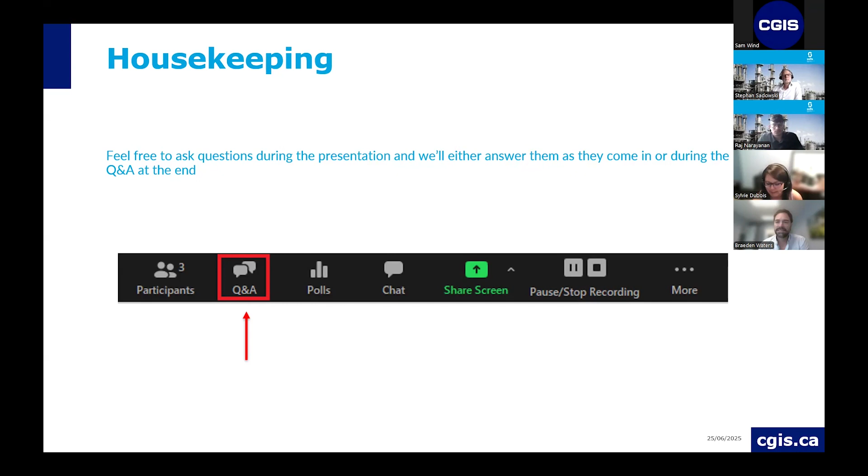Thanks, Sylvie, for the introduction and for giving us a chance to present some incidents. Well, the incidents haven't been nice, but they give us a chance to introduce them and showcase what can be done to prevent such incidents in the future.

First of all, the purpose of Sofis is to protect the people, the property, and the planet with our expertise and solutions to guarantee safe and efficient valve and manual valve operations. First of all, no injuries, no accidents, no spills, no loss, no downtime.

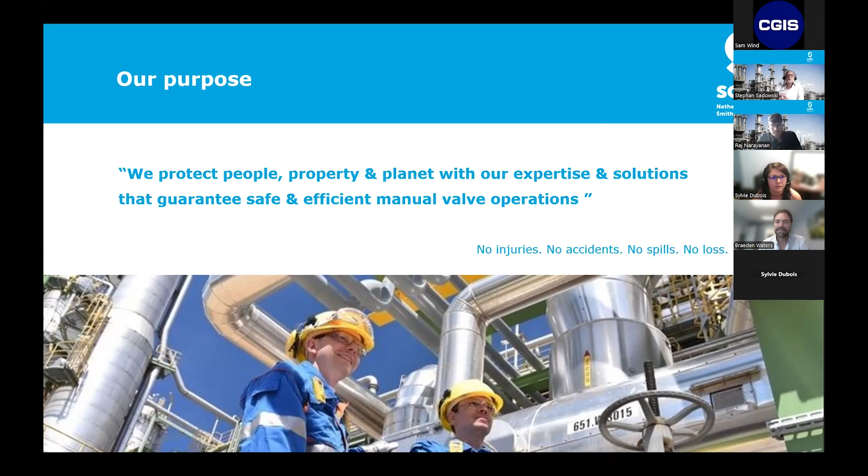In today's webinar, after a first introduction, I want to give you a short overview about the captive key system. Then I will introduce the US Chemical Safety and Hazard Investigation Board. After that I will jump over to the first incident at a refinery in Louisiana, followed by the second incident at the MGPI processing plant in Kansas. And then afterwards, we will have the Q&A.

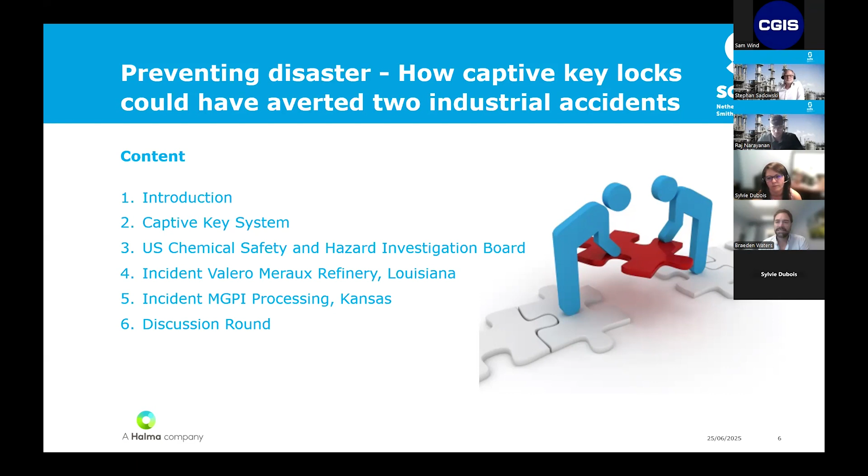My name is Stephan Sadowski. I'm the head of business development at Sofis. My background is mechanical engineering, and I'm now over 27 years within this business.

Sofis is a manufacturer and provider of individual captive key and valve operation solutions for the process industry. Our strengths are the adaptation of customized solutions for seamless implementation into the existing infrastructure of our customers. Sofis is a merger of two companies, Netherlocks and Smith Flow Control, and that merger happened in 2016. Sofis is part of the Halma company. Halma is a global group of life-saving technology companies split into several sectors, and Sofis is part of the safety sector.

Halma was founded in 1894. First time I thought, oh, might be a typo, but no, that's true. Halma began as Halma Tea Estate Company Limited, focused on rubber production and tea planting in Ceylon. Nowadays, we have over 45 companies under the Halma umbrella, with around 7,000 employees, and Sofis is part of Halma.

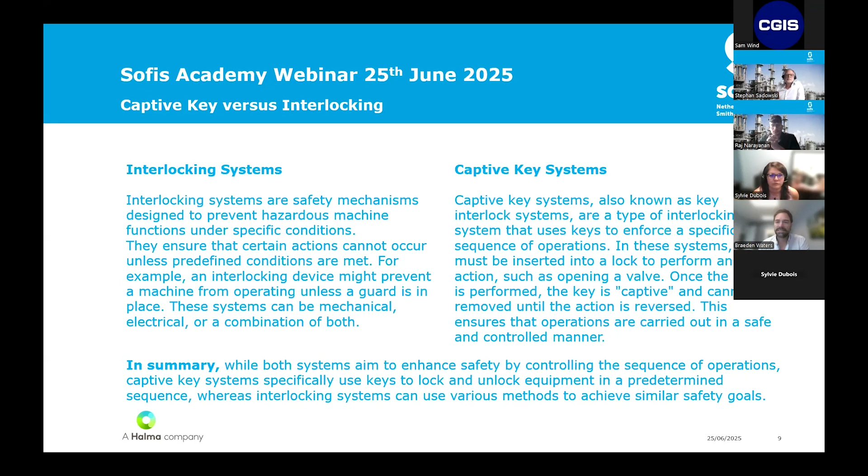If we talk about process safety and sequence control, I want to showcase some small examples of the different safety principles versus their investment costs.

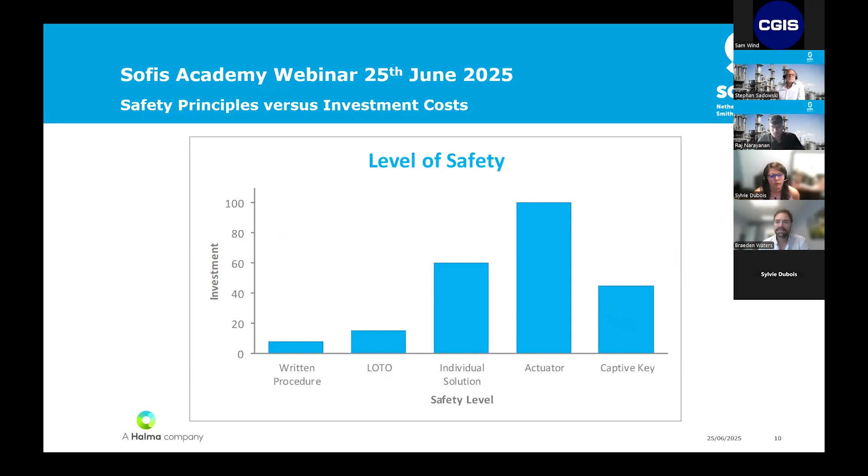And this is also what you can see in the two incidents today. What we also can see is that written procedures tend to be ambiguous, complex, and require time-by-time judgment or decisions from the operators. And this is definitely something we want to prevent.

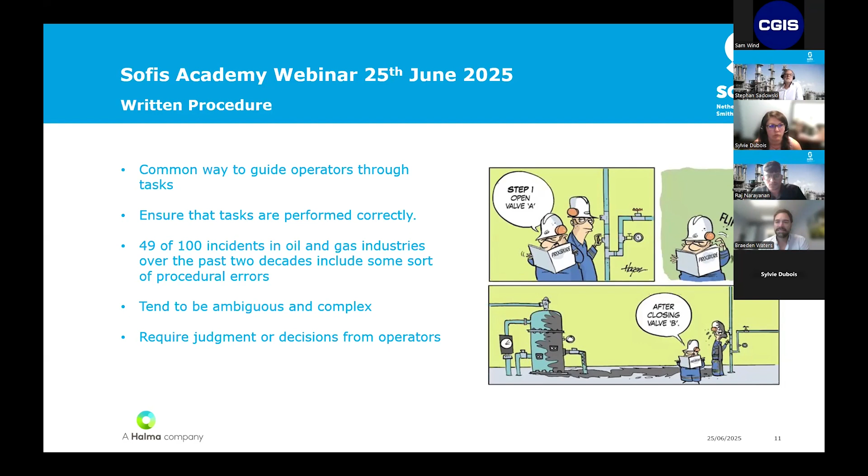If we now jump over to lockout-tagout, in a more general definition, lockout-tagout is a procedure used to isolate hazardous energy sources to prevent accidents during servicing or maintenance. For the process industry, it is common to use this method to prevent, for example, valve operation. Valves that should be blocked in an open or closed position because of the process get equipped with car seals, hand wheel covers, or similar blocking solutions.

Therefore, a clear differentiation between the two different ways of use is necessary. The main challenges are lack of procedures, what we touched already before. Also, the training of the employees is an important aspect and should not be underestimated. From our own experience, we know that there is a lot of room for improvement by using lockout-tagout.

Online training becomes more and more a useful tool. The use of the right tags and padlock is also a very important aspect within lockout-tagout. Therefore, it should be clear to have procedures in place to separate the different ways of use. As already mentioned, it is very common to use this method to prevent valve operation.

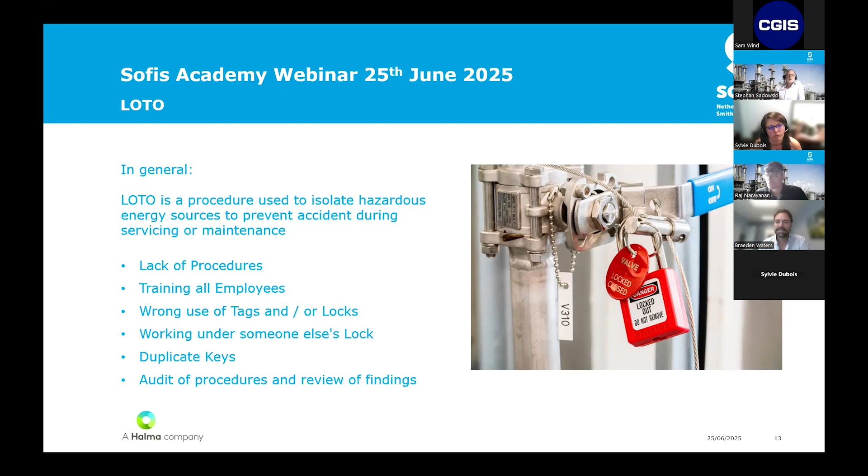So this is a method you can use for boundary valves or not really safety-relevant valves where you want to have a dedicated sequence of operation.

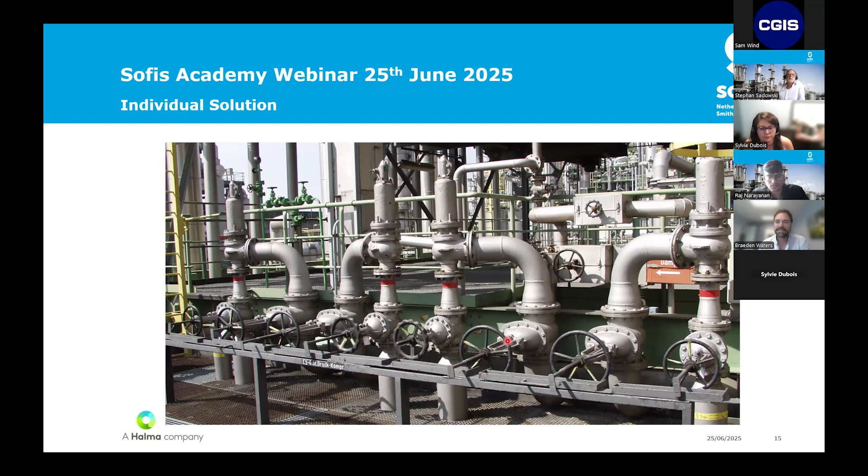The disadvantages of such solutions is that you have to bring all the valves to the same level because there are welded flex in front of the stems. So this requires already design impact. There is a lot of steel work required in front of the valves, so this will also hamper the operator from operating the valves in a proper way. The large sliding bar is difficult to handle, and yeah, it's a space-consuming design.

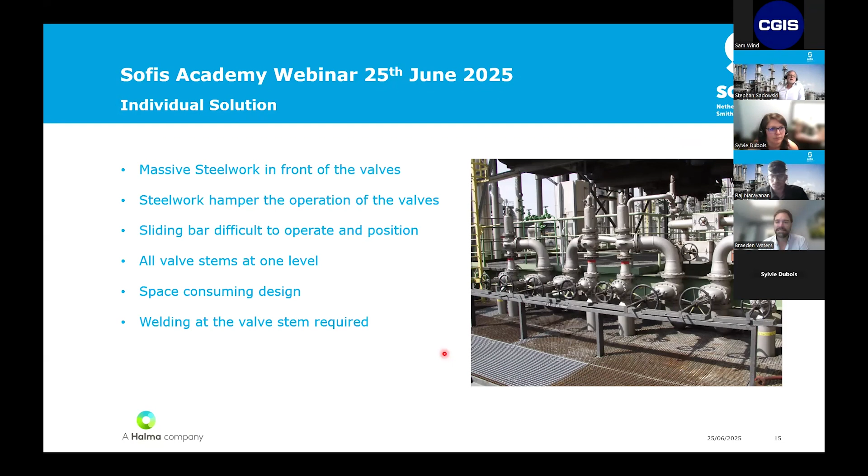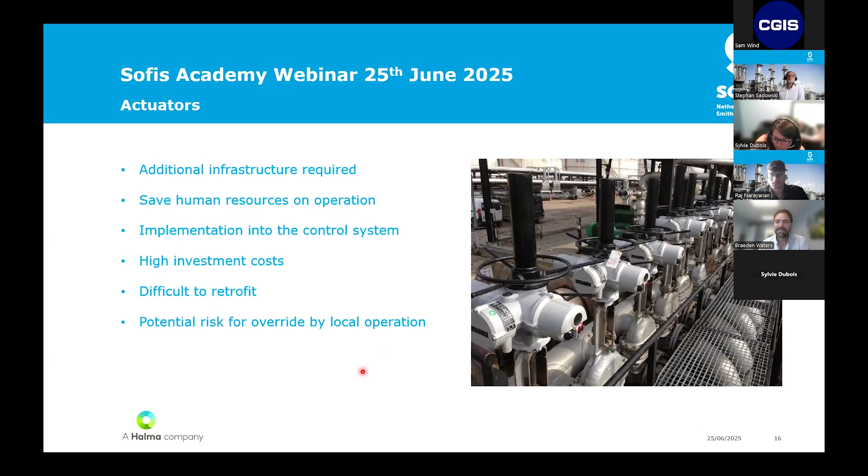If we look at full automated systems, this is definitely a solution, but also there you need to take care about the existing infrastructure. To retrofit actuators in a brownfield plant is always a challenge. You need to have the cabling in place, all the signals and everything else. So this might be an option for greenfield projects, but not really for brownfield projects.

If we look now to the captive key systems, this is a fully mechanical solution, and it will guide the operator to the unique sequence, which will be adapted to the process requirements. And to guarantee the right sequence of operation, we are using unique coded keys. There is no misinterpretation on the steps possible because you have the coded keys. We are also able to handle even complex processes in a safe way, even if they are not linear.

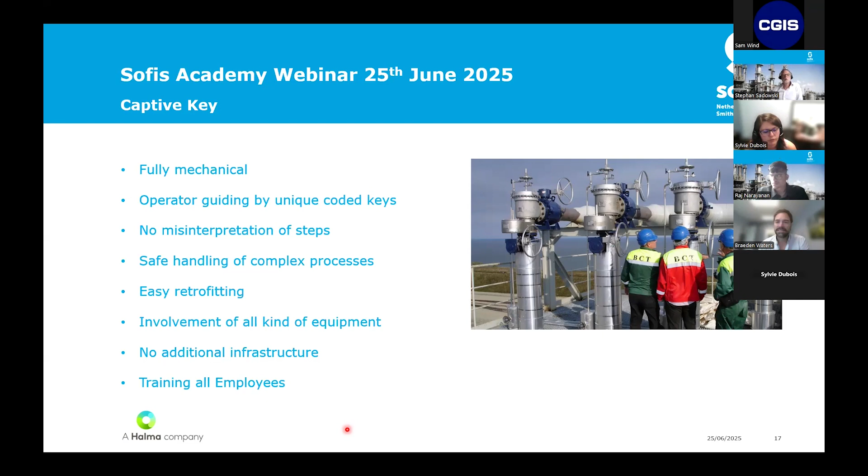It's easy to retrofit on every type of valve, even in brownfield projects. And it can also involve all kinds of equipment, doesn't matter if you have valves, actuators, or pig trap doors, or what else. No additional infrastructure is required, and yes, you need some kind of training for the employees so that they understand how to operate the valves in the right sequence.

The LOPA handbook described also the use of captive key systems. In the LOPA handbook, it's described as an independent layer of safety and will give you some credits in your HAZOP. The description of the captive key system is that it is a mechanical linkage between the valve, using unique coded keys to prevent movement of a device such as door, handle, or valve.

This prevents humans from operating the valves in the wrong sequence. The captive key lock capability is an integral part of the hardware design, so the captive key lock needs to be one part with the valve, so there is no chance to separate both during normal operation.

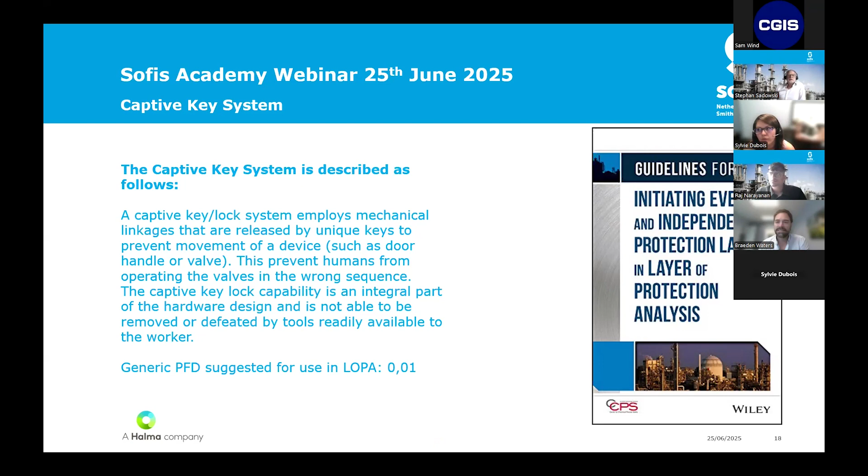Now let's have a look at the incidents. What I do is continuously review the reports from CSB, the US Chemical Safety and Hazard Investigation Board. They do a really great job investigating chemical incidents, and the CSB is an independent federal agency. If you haven't heard about them or seen their website, it really makes sense to visit them and have a look.

Let's start now with the first incident. On the 10th of April 2020 at the Valero refinery in Louisiana, there was a release of a mixture of hydrogen and hydrocarbon gases in the hydrocracker unit, and these gases formed a flammable vapor cloud. This cloud got ignited, resulting in an explosion and fire that seriously injured one of the Valero operators and caused damage of over 5.15 million dollars in property. What happened?

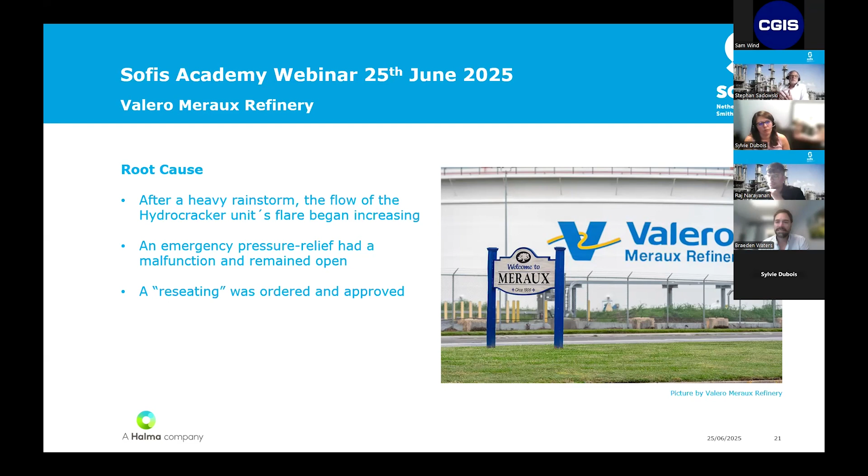The root cause was that after a heavy rainstorm, the flow to the hydrocracker unit flare began to increase. After some investigation, they figured out that the emergency pressure relief valve had a malfunction and remained stuck open. Common practice at Valero refinery was the reseating of the safety valve, and this process needs approval from the plant manager, and this approval was ordered and got approved.

The two operators went on site to the safety valve, and they had concerns reaching the 6-inch inlet valve, because the procedure told them they had to close the inlet valve partially until the safety valve reseated, then open the inlet valve again and hope the safety valve would stay in a tight position. The operators could not really access the 6-inch inlet valve. Therefore, they decided to close the 20-inch outlet valve instead. What was the result?

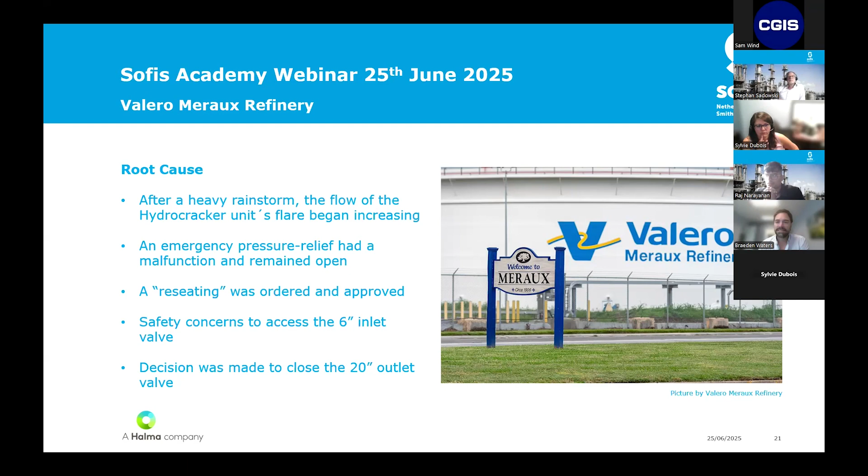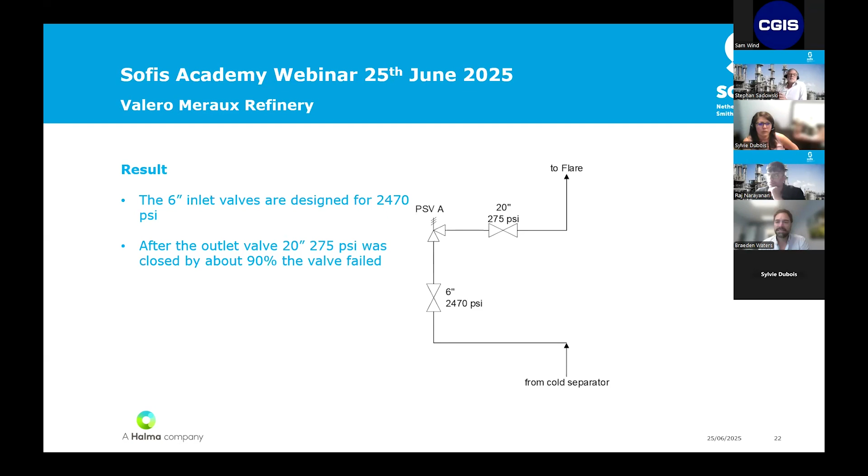If we look at the design specifications, the 6-inch inlet valve was designed for 2,470 psi, and the outlet valve, a 20-inch valve, was only designed for 275 psi. After they closed the outlet valve by around 90%, the valve failed. This ended up releasing a high pressure mixture of hydrogen and hydrocarbon vapor into the surrounding air, and the flammable gases formed a vapor cloud that got ignited, resulting in the explosion and fire.

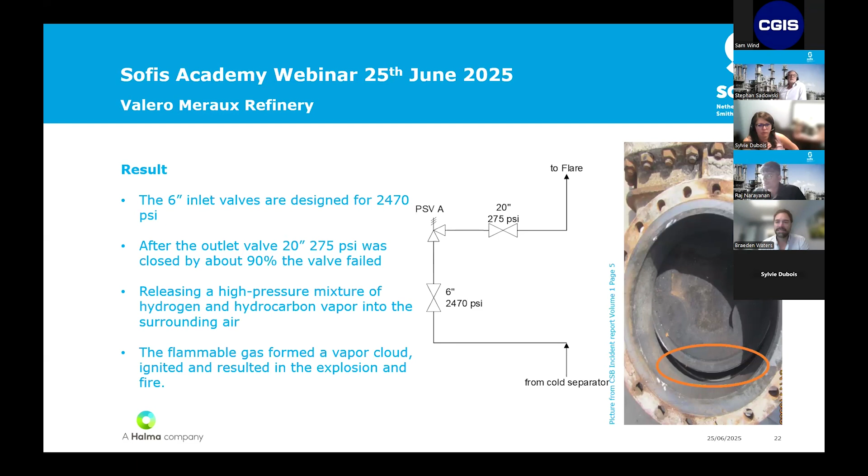How could this have been prevented? By the implementation of a captive key solution, this incident definitely could have been prevented. The captive key solution requires the involvement of both the inlet and the outlet valves, and this guarantees that the outlet valve cannot be overpressurized. It also guarantees continuous pressure protection of your equipment.

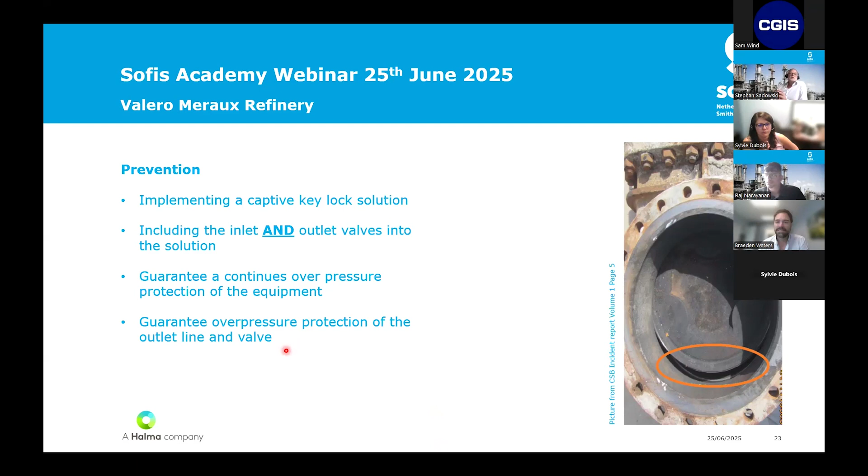If you do a changeover between a redundant PSV system, you have to bring the standby PSV into process before you can start isolating the other PSV system. This will also guarantee the overpressure protection of your equipment upstream of the PSV systems.

If we look at typical specifications in the industry, we can see this setup: a redundant PSV system with inlet valves and outlet valves going to the flare system. Most of the time, we see that our customers only interlock the inlet valves, to guarantee that at all times one PSV is in process. So in this case, you have to open first the inlet valve of PSV B before you can start closing the inlet valve of PSV A.

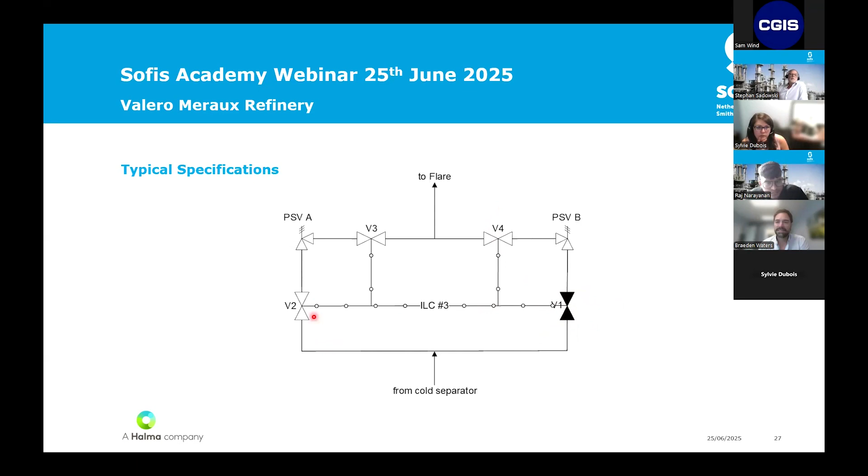On the outlet valves, most of the time they put lockout tagout devices to block the valves in an open position, but this is an unsafe situation. We recommend using this kind of setup where you interlock the inlet and outlet valves. In this case, you have to open the inlet valve first before you can close the inlet valve of safety valve A, and then you can start to close the outlet valve of safety valve A.

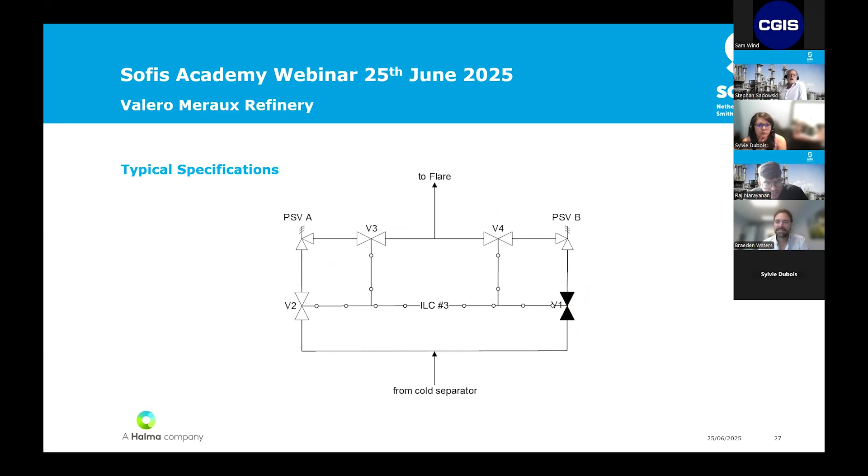This is a typical example of a captive key solution for a redundant PSV system. Here we see the CKC, which is the control key cabinet. The control key cabinet is placed in the control room.

Starting with key 1 coming from the control room, the operator will place the key in the inlet valve of safety valve B. Now he can start operating the valve. He will open the valve, and after the valve is fully open, he can release key 2.

With key 2, he can go now to the inlet valve of PSV A, insert the key, close the valve, and after the valve is fully closed, he can release key 3. With key 3, he goes to the outlet valve, insert the key here, close the valve, and release key number 4. Now the PSV-A is fully isolated and can be taken out for maintenance purposes.

Like reviewing the PSV or whatever. With this kind of solution, we guarantee that all the time one PSV is in process, and we also guarantee that you cannot close the outlet valve before the inlet valve is closed. So this will give protection, overpressure protection also to the outlet valve.

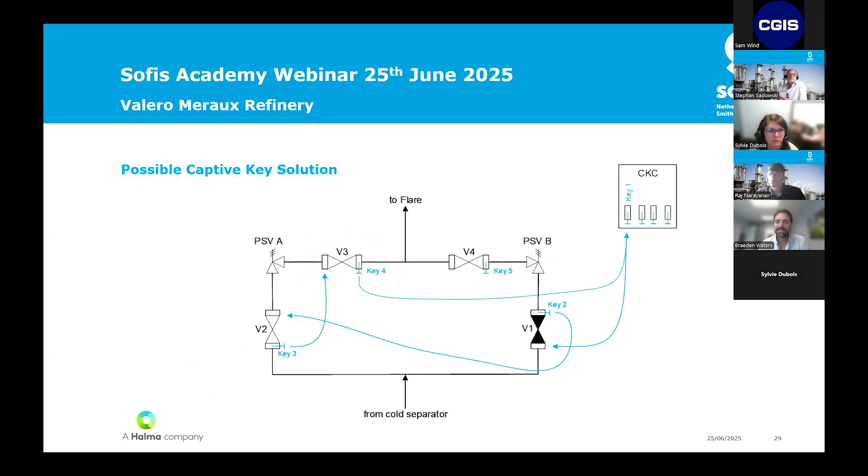What are the key features? Safe operation of a redundant PSV system, which guarantees the protection of the equipment up front. We protect the outlet valve against overpressure.

A clear indication of the isolated PSV by the end key in the control room. So you can use the information coming from the key to make your work permits, because the key will indicate which PSV is isolated and which PSV is in process.

There's also the option for easy implementation of pilot valves. This is also an important aspect. If you have a pilot-operated safety valve, you also need to implement the pilot valve into this sequence of operation. And last but not least, there's also the option for cascading of redundant PSV systems to prevent chattering, for example, of PSVs in case of actions.

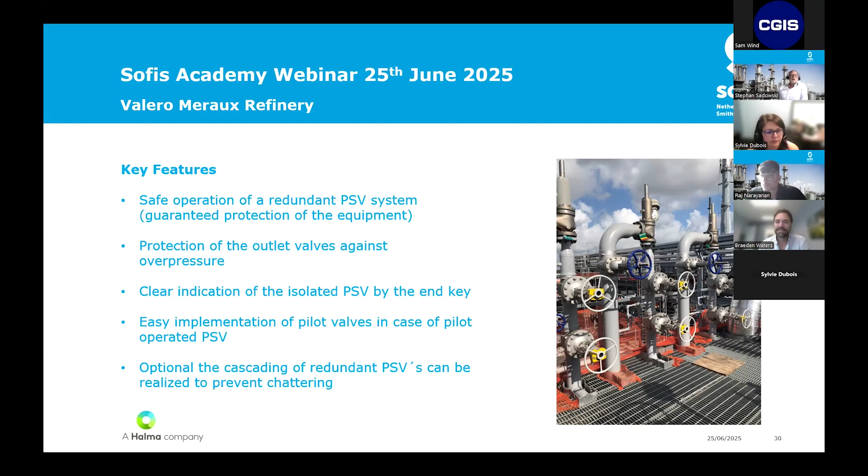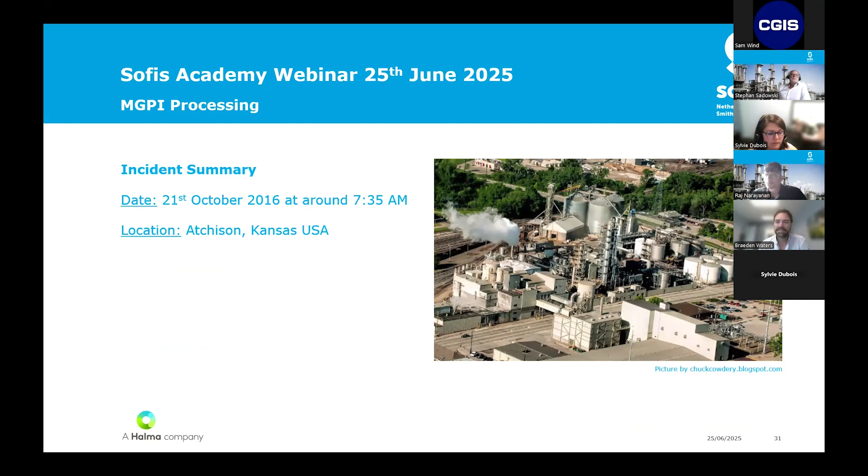Let's jump to the second incident. The second incident happened on the 21st of October 2016, at the MGPI processing plant, which is placed in Kansas.

At the accident, there was an accidental mixing of incompatible components, which have been sulfuric acid and sodium hypochlorite. This produced a cloud containing chlorine and other components. The cloud impacted workers on site and members of the public in the surrounding community, what you can also see here on the picture.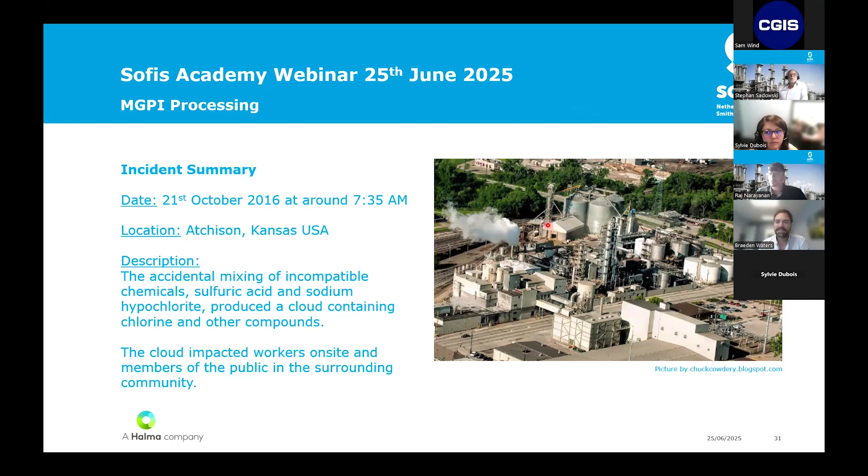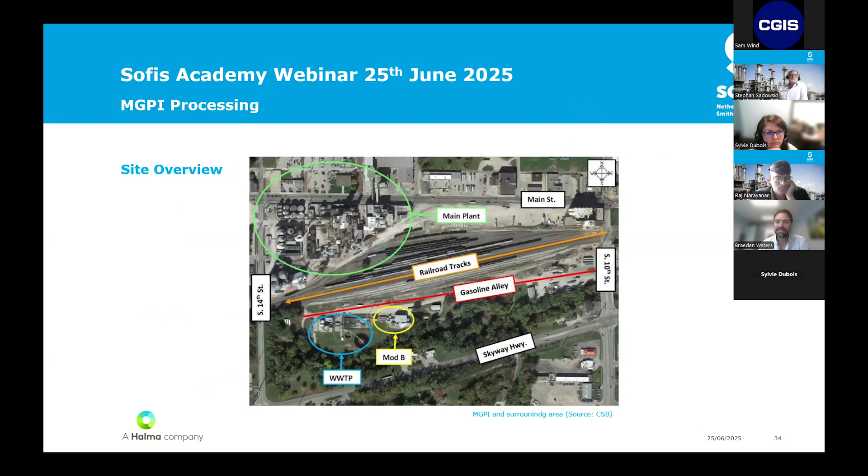On this picture here, you will see this is the location where the unloading and offloading happened. This is the plant, and here you have the surrounding public areas which have been impacted also by this incident.

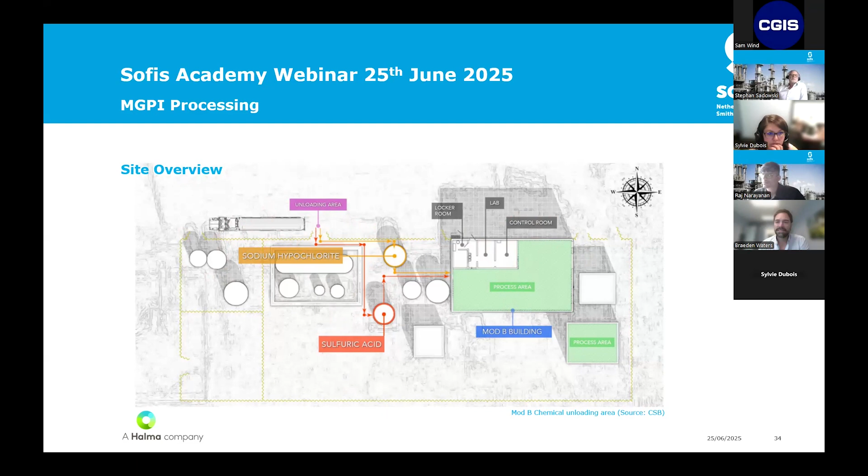Here you have a more detailed overview. There is the Mod B building where the operators are normally placed. This is the unloading area, where the truck drivers connect their hoses and unload the chemicals. This is how it looks like at the unloading point.

And what happened on this day? The truck driver arrived early in the morning, and the operator from the night shift was present, and he accepted the delivery of the 30% sulfuric acid. Then the operator escorted the truck driver to the unloading area.

At the unloading area, the operator unlocked the gate in front of the transfer equipment and removed the lock, the padlock, which had been on the cam lever dust cap for the sulfuric acid fill line. But the truck driver was at his truck and had done some paperwork at this time.

Then at a later stage, the operator reports that he pointed to the line of the sulfuric acid, but the truck driver reported no, the operator didn't point it to the fill line. So what happened afterwards?

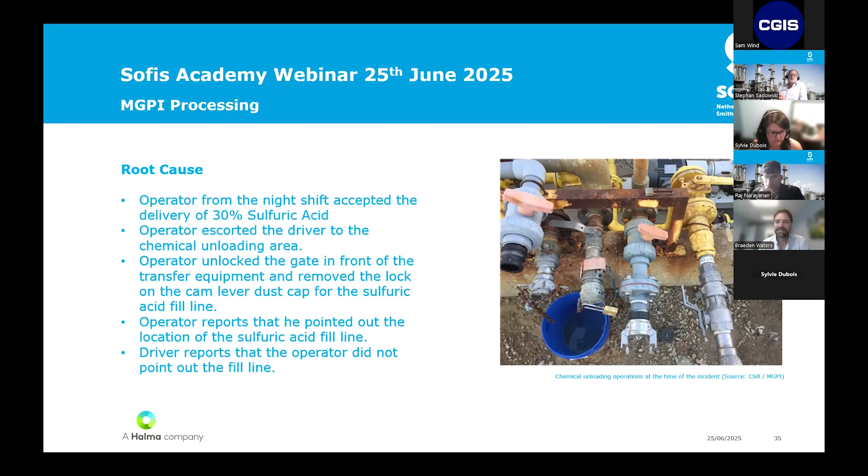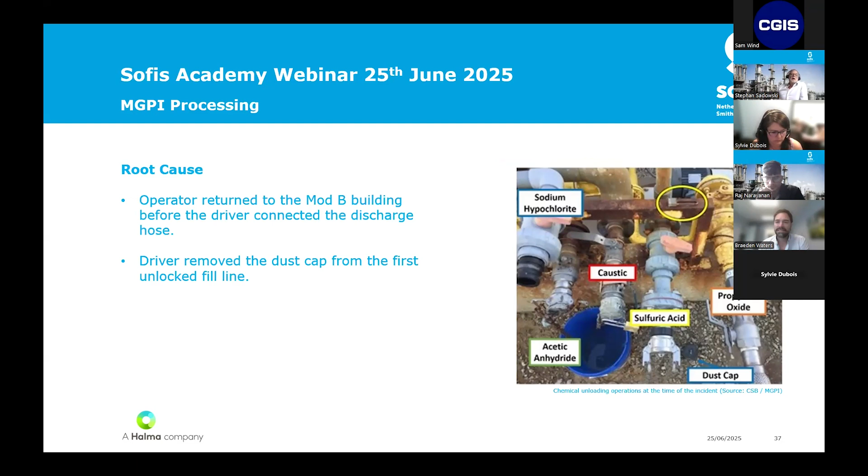The operator returned to the Mod B building, and the truck driver started to connect the hoses to one of the unlocked fill lines. By accident, he connected the hose to the wrong line and started the unloading process.

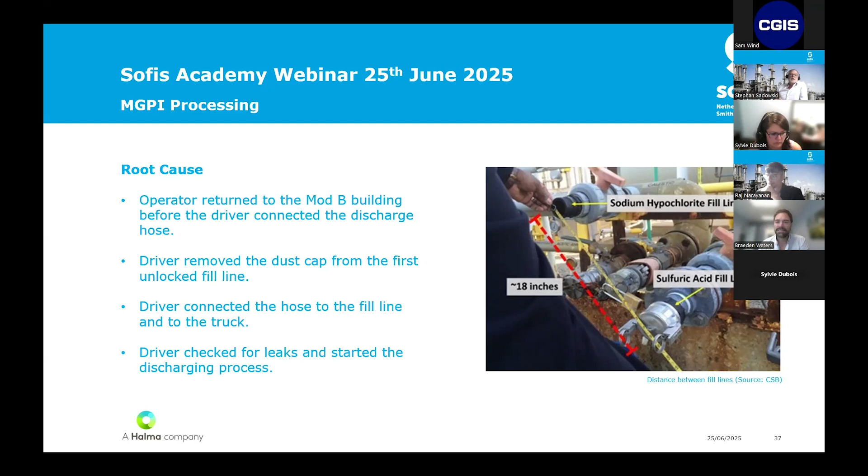After that, the truck driver checked if there had been any leakages at the hoses. The result was that the sodium hypochlorite fill line was unsecured and therefore accessible for the driver.

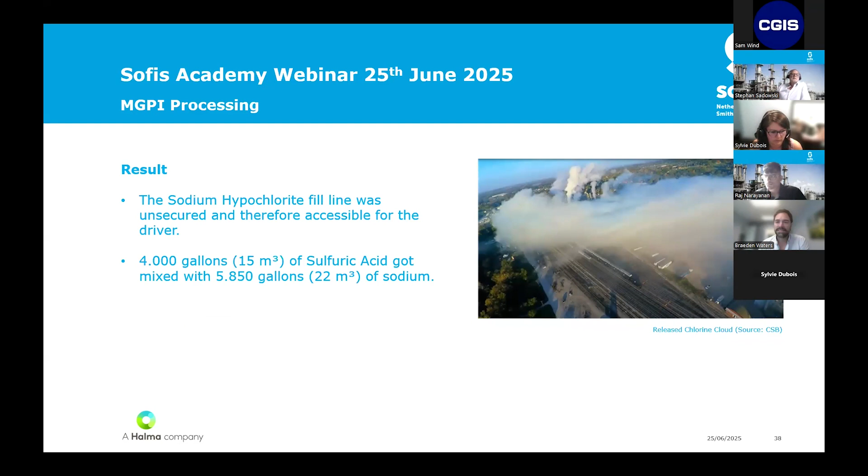He unloaded around 4,000 gallons of sulfuric acid into the sodium tank, which had an input of around 5,850 gallons. These two chemicals reacted and produced a theoretical maximum gas cloud of 3,490 pounds, which was a mixture of chlorine gas and other gases.

These gases have been released through the 3-inch atmospheric vent valve and the 18-inch lid of the roof of the bulk tank. What you can see here from the picture is a gas cloud which moved across the facility and to the public area.

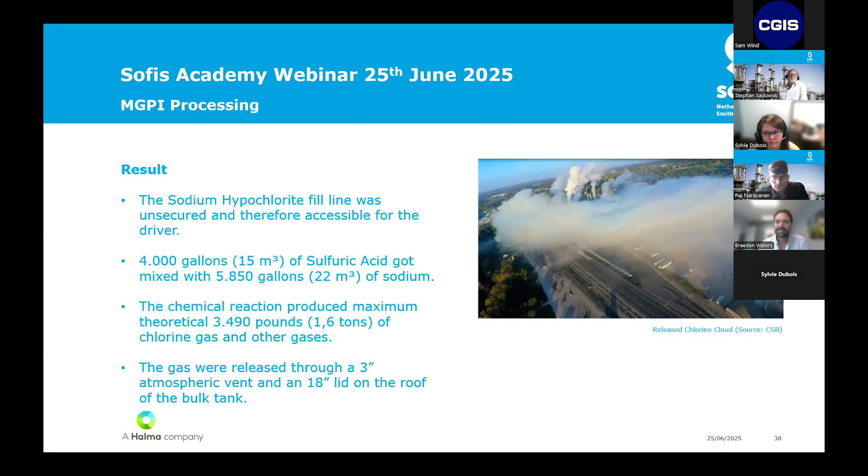How could this incident have been prevented? There are several options. First of all, you can use two different fill line sizes, or you can use different shapes for the fill lines.

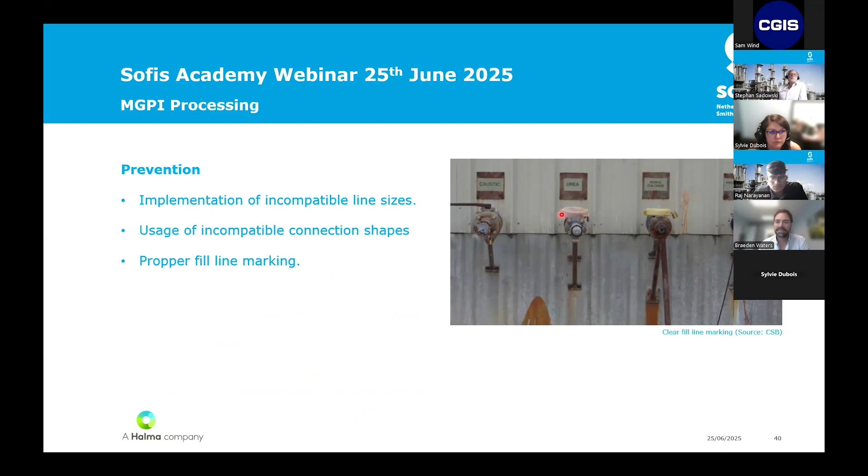What also was missing at the site was a clear indication of the fill lines. Another option would be to put really specific cages in front of each fill line so that you guarantee that only one fill line is available for the customer.

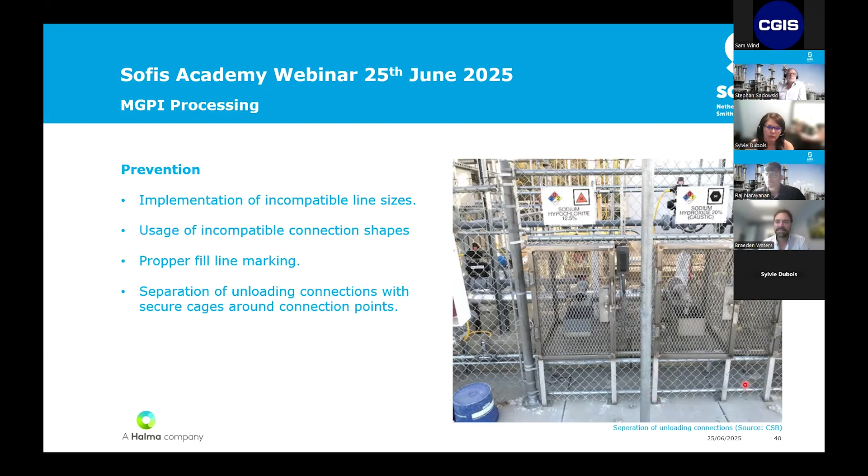Another option would be to implement the Sofis SiLoC solution. How does the Sofis SiLoC solution work?

When the customer recognizes that he needs the refillment of one of his products, he will place a PO at the supplier. With the PO and the delivery note, there will be a QR code printed on the delivery note. The truck driver arrives on site and then he hands over the delivery note to the operators or to the security.

The security starts to scan this QR code at our SiLoC solution, and the SiLoC solution registers which product is loaded on the truck. Then the system decides which key needs to be released, and this key will be highlighted.

The security person will release the key from the cabinet and hand over the key to the truck driver. Now the truck driver will drive to the loading bay.

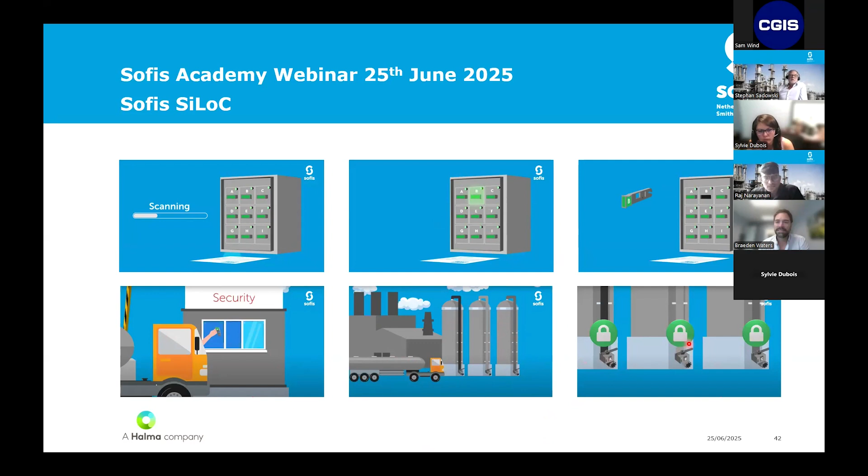At the loading bay, all of the loading lines are equipped with a captive key lock. So the truck driver will connect his hose to the loading point, and after the hose is connected, he will insert the key, and only this key will fit to one loading point.

So you can guarantee that there is no mix-up of the products. Now he is able to open the line and unload the product.

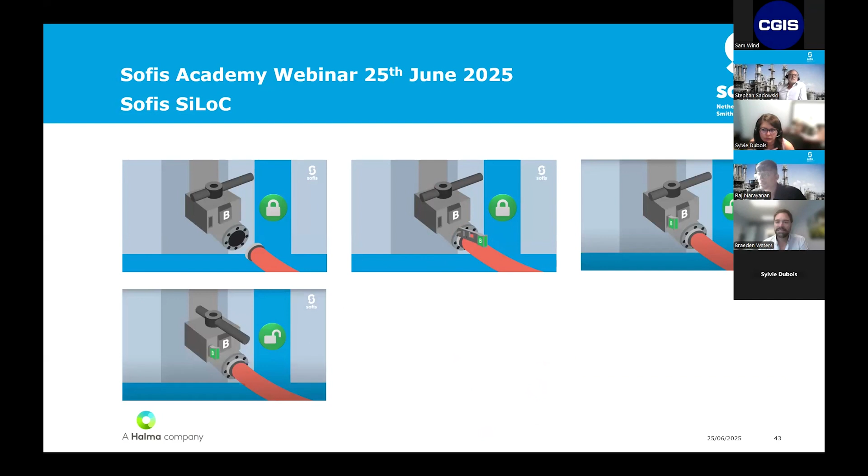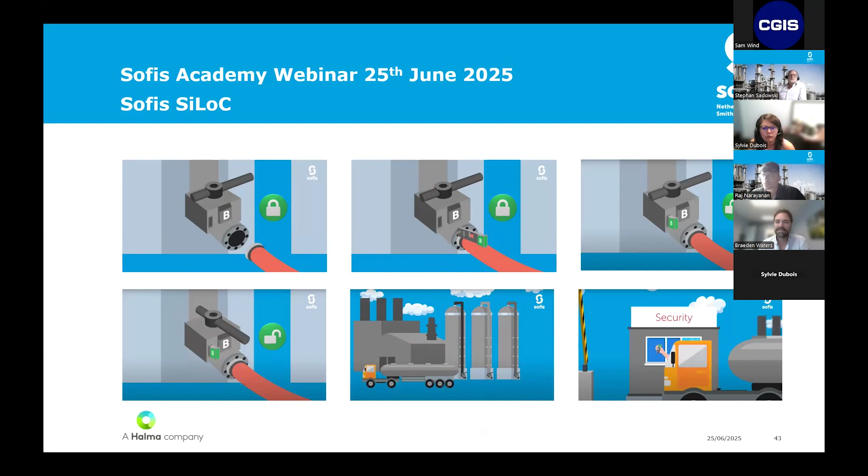After he has finished the unloading process, he will disconnect the hose again. After he closed the valve, he will release the key, and with the key he goes back to the security, hands over the key, and the job is done in a safe way.

What are the benefits? We are fully eliminating human errors during the fill line selection process because of the unique-coded keys. We have unique-coded keys per silo.

There is also the option to group silos. So if you have the same product in several silos, then you can set up the same key code for these silos.

There's also the option to interlock silos against each other. So if you do not want the filling process to be done on several silos at the same time, this can also be realized with this solution.

And there's also the option to provide furthermore information to the SCADA system to showcase which silo will be unloaded or will be filled at the moment.

Last but not least, there is also a connection possible to the DCS system for the interaction with other components, like with a pump startup or whatever.

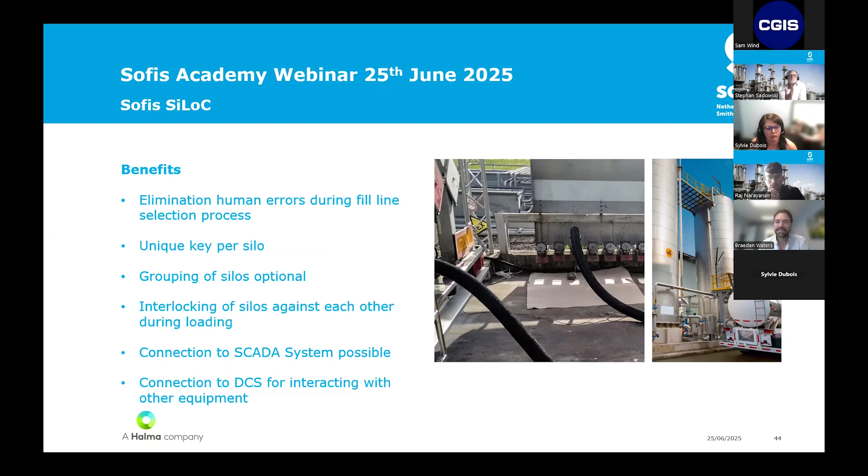So that's it so far from my side. Are there any questions?

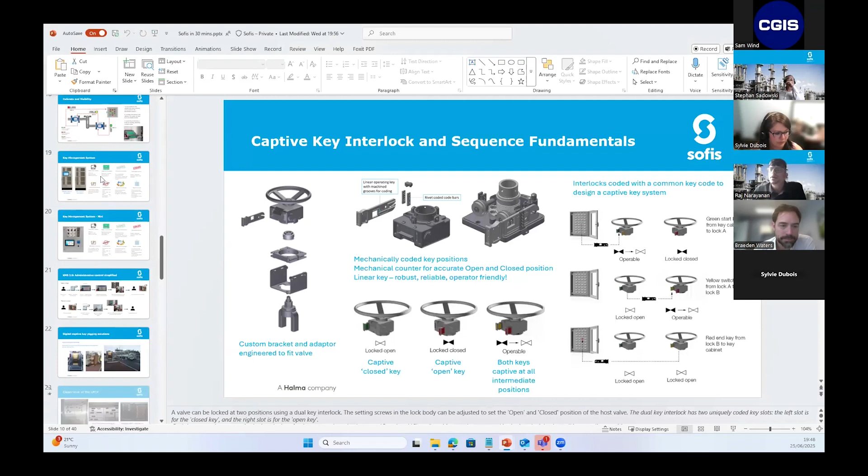Okay, is my screen visible? So with the key management system, before I dive in, I'll show you one more graphic. The key cabinet in the control room that Stephan referred to solves multiple purposes. The first thing is to hold the start keys that start the sequence for each system. So let's say this is a filter system, or you might have a pigging line like this, a pigging sequence like this, or you could have a PSV sequence like this.

Everything starts with one key coming out of the control room, which kickstarts the rest of the process. The cabinet holds the start keys of all the systems, but it also reflects the status of the system on site. This is done by color coding and tagging the keys in the key cabinet correctly. So if, say, this green key is inside, it can tell you exactly what the status of each of those valves in that sequence is, and it can guarantee that for the operators in the control room.

What we're trying to do is bring all of that functionality of storing the right keys in the control room, plus giving visibility, plus also managing the administrative control aspect of tracking keys and managing key handouts. So who gets access to those keys? When did they take access of a certain key? When did that key get returned? What function was achieved using that key? Was a valve status changed? All of these things can be gathered and brought to the same system using a key management product.

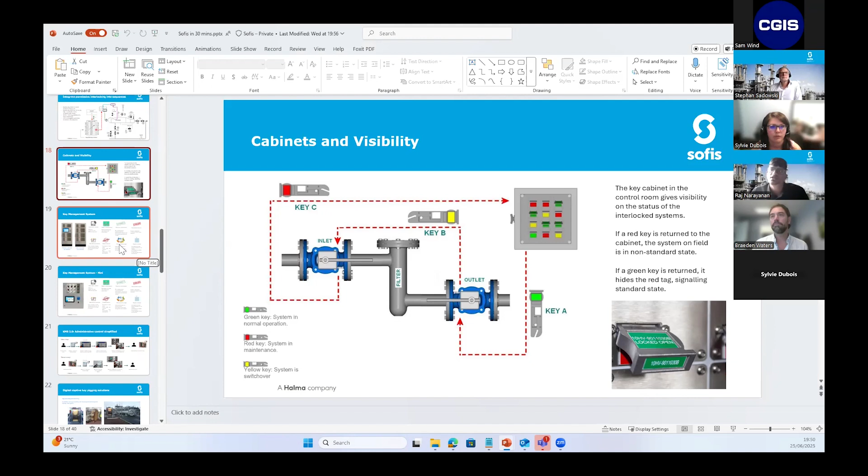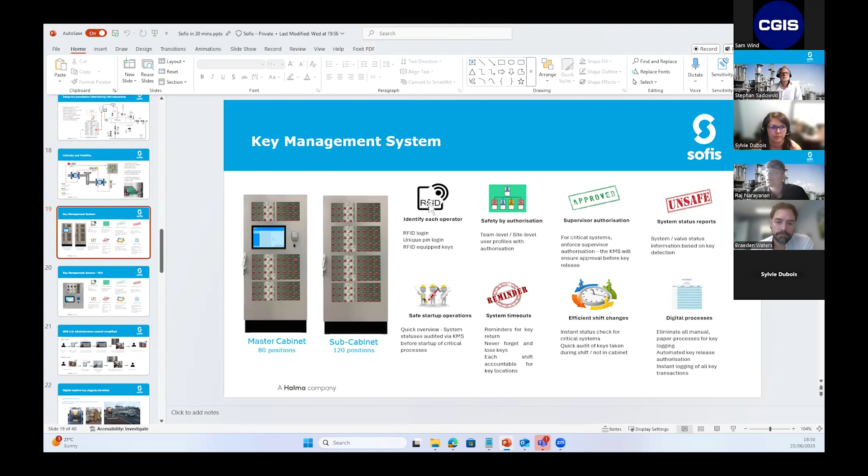So in this situation, the key management system comes with a touchscreen computer and RFID. Typically, an operator would scan their access badge, search for the system they want to access, and toggle the release of that key from the screen. As soon as that happens, the right key position glows up. You press the push button on that key position, a solenoid triggers the release of that key, and then you can walk away with that key. This controls who has access to keys based on who they are, and also gives you all the reporting functionality that comes with key management.

So that's the short gist. I can share brochures or a technical data sheet as required.

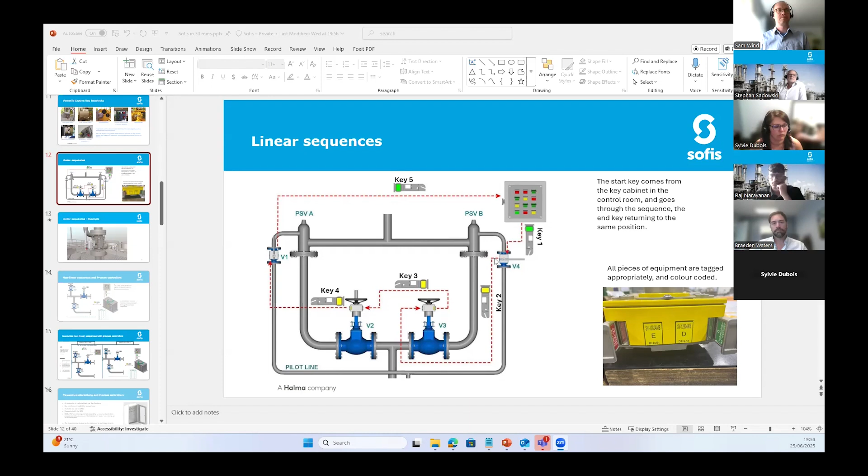You can maybe take an example: the operator is like a motor of an actuator. The programming of the sequence and the locking functionality is done by the captive key lock, and the operator is a motor who is operating the valves, and that's it. He has no impact on the logic.

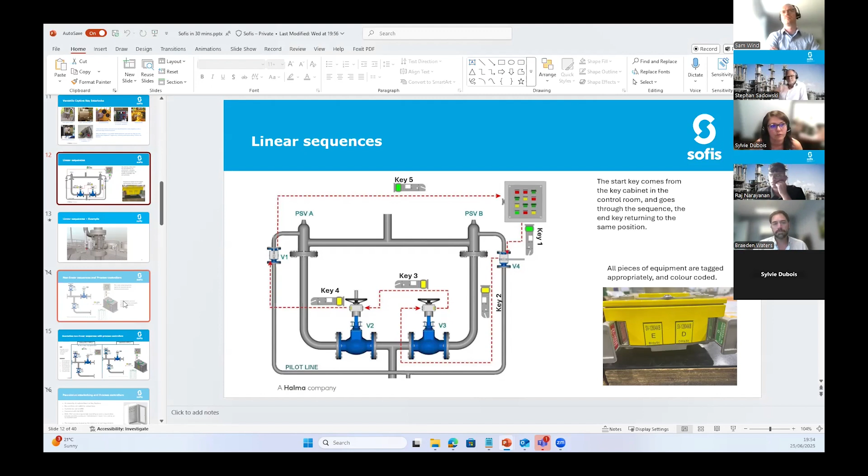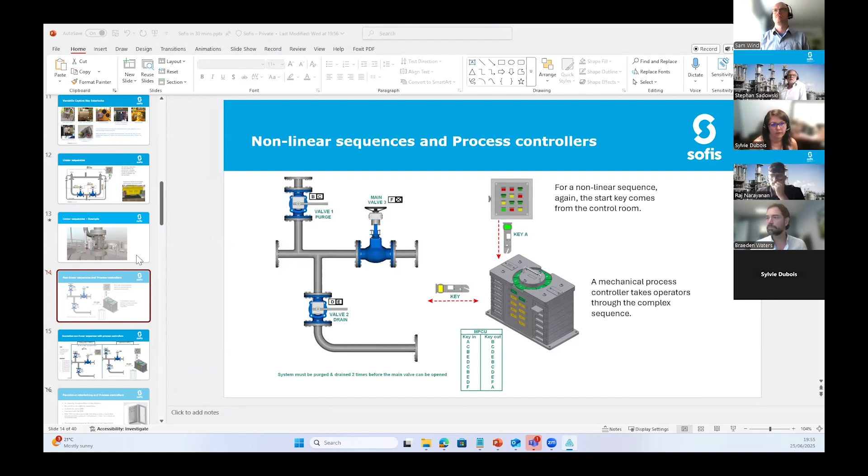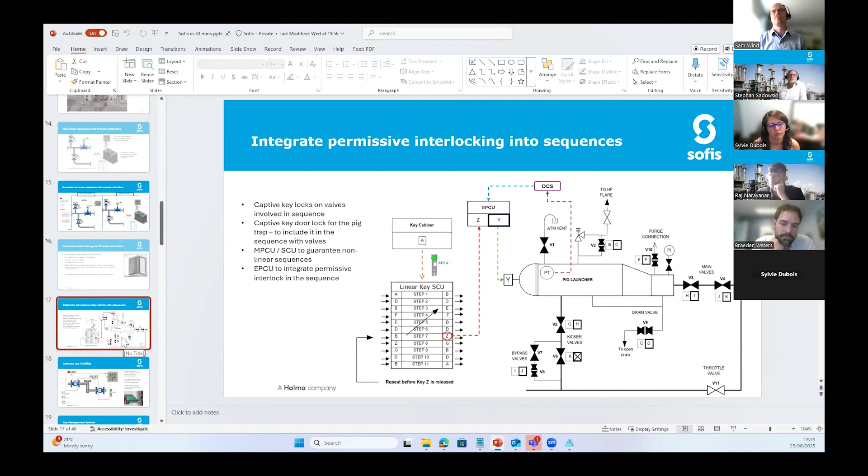If you have non-linear sequences, then this is also possible. There we have the mechanical process control unit, where you have a kind of mechanical setup of all the steps that need to be executed. With such a mechanical process control unit, you can step back and do a lot of steps in between, like for example in pigging applications. This is a very common application for nonlinear sequences, where you have to purge and drain and vent several times, and there you also use this kind of mechanical process control unit. Then at the end, after everything is drained and vented and purged, you are able to open the pig trap door to insert your pig or to release your pig.

Awesome, thank you Stephan. I have one last question. I think we've answered most of them, but maybe for Raj, when do you normally get involved with working with EPCs or end users on designing the interlock system on a project?

But my personal recommendation is that we are involved as part of the detailed engineering phase of the project, where once you've built out a sequence of operation for any process, if you identify that there is a risk that the process can be followed incorrectly, someone could deviate from the safe sequence that has been envisioned for that process, and you're like, this could go wrong because someone makes a mistake with the order of operation or when they operate a certain valve. I think that's the best time to reach out to us and be like, can you design a captive key solution for this?

Then we can sit with the customer and actually try and identify what constraints they want on the process. So sometimes it might just be, I want to do A, B, C, D in this order. But sometimes it could also be things like, I want a pressure transmitter to be sending a signal to a certain key position that now this is safe to release. And these things, the earlier we discuss it, the better, because it also involves conversations not just with the process team, but also might go into piping or instrumentation and control. So as early in the detailed design stage as possible is better.

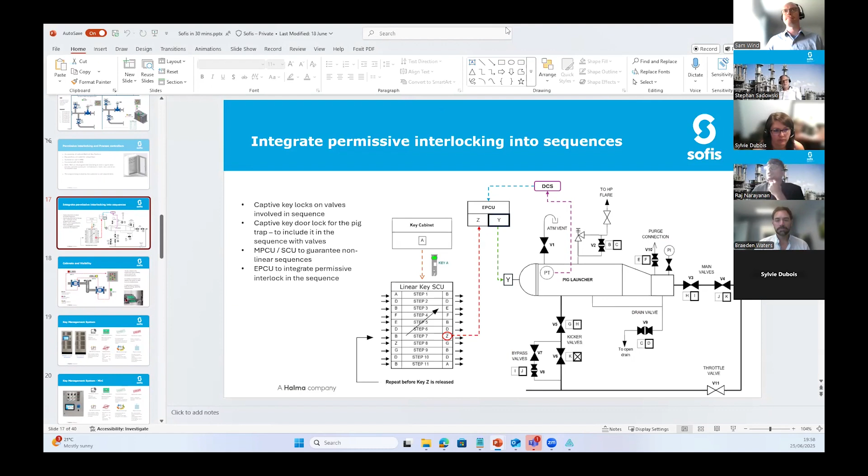But then we also have master keys that can open pretty much any lock. These are then managed by the supervisor level hierarchy employees in the operation team, for example, and managed separately in a separate cabinet, like a smaller key management system or a separate control room key cabinet. In situations like these, you might permit the use of a master key, and that's then used temporarily till Sofis sends out a replacement. We can make a replacement in a day and ship it out, so that's not a big worry as well.

Gotcha, thanks. And along the same lines, a question came in just about if people leave the organization and they need access to the key management system, the reprogramming and updating - is that something we can support with all of that? Yes, we will support that.